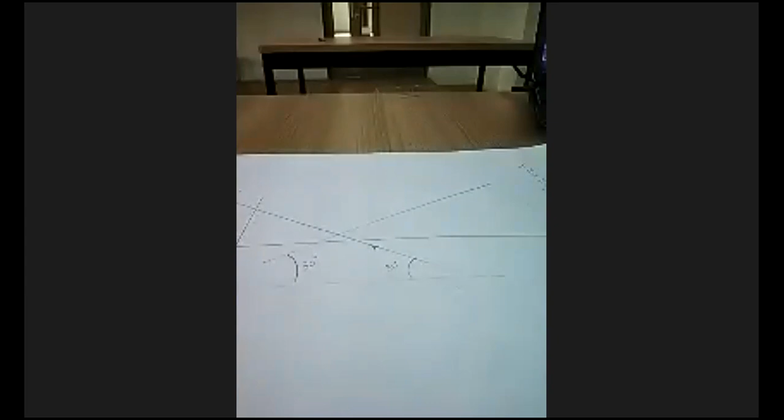And draw that line. This will be 30 degree. Clear? 30 degree. Similarly, you can draw 60 degree line with this portion. So 30 and 60 can easily be drawn with this set square. Understood?

Yes, sir. 45 degree line can be easily drawn with this set square. This is 45. This is 45. This is also 45. Okay, so 45 is also done. And

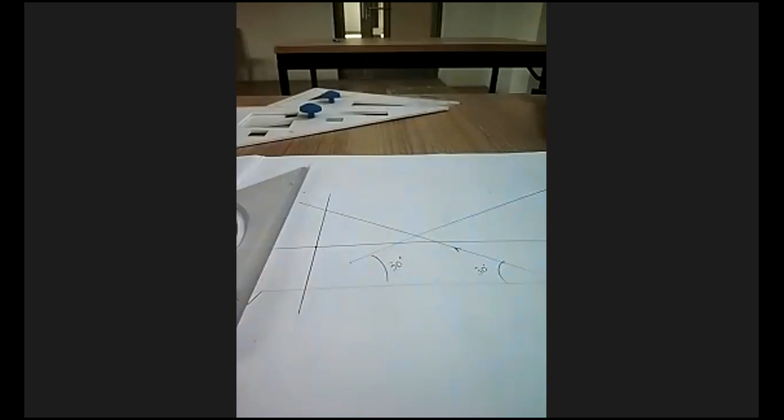75 degree. How we will draw 75 degree? Okay, we're using set square only. So for that, first of all, we have this reference line. This is first step. Then we will draw this perpendicular line to the reference line. Visible? This perpendicular line. Assume it to be perpendicular. Fine. Now what we will do? We'll do it like this.

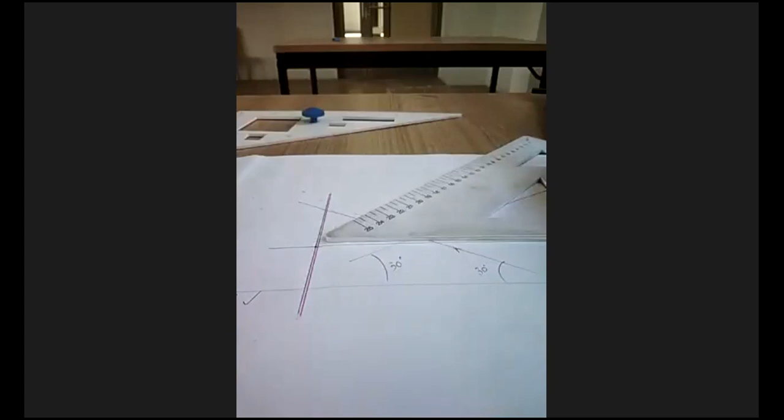How much angle is this? This is my set square. How much is this one? 45 degree. Okay, so I will put my horizontal edge on reference line. Clear? So this is right now 45 degree. And this is also 45 degree. Isn't it? Because earlier this was 90. Now it is 45. Correct or not? Yes, sir.

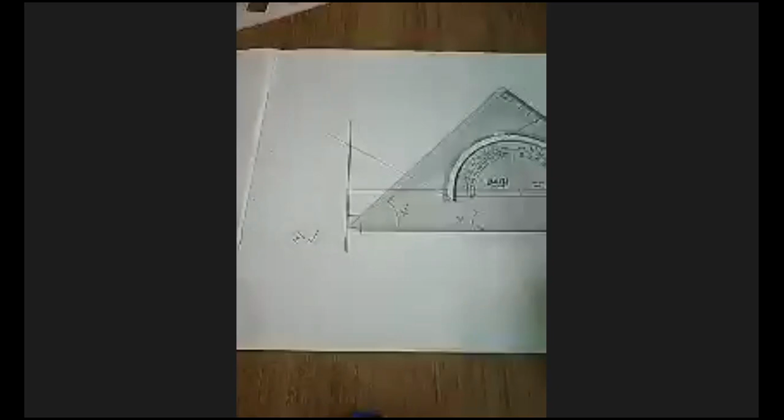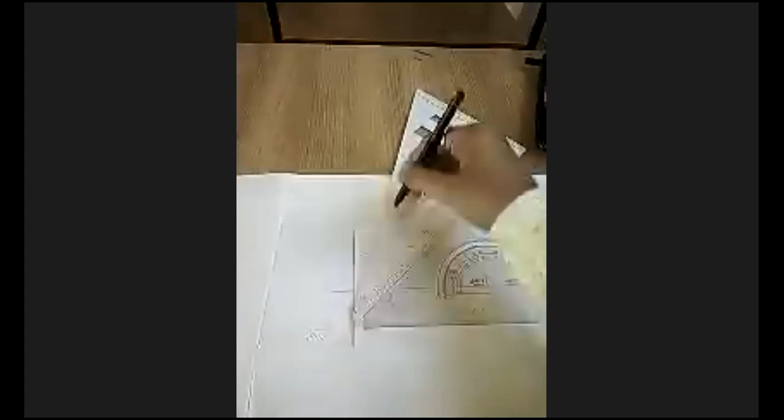Okay, now I am having this 30 degree set square. So I will put it like this. So now, how much degree is inscribed by both set squares together? This is 45. This is 30. So how much is it total? 75. Okay, so we can easily draw 75 degree line, isn't it? Now this line will be 75 degree. Isn't it?

Yes, sir. This is 45. This is 30. So total is 75. This angle 75. So we will draw that 75 degree line. That is also given 75 degree. So this will be 75 degree. Got it? This is our reference.

Everyone understood how we draw 75 degree line? Understood or not? Everyone understood how we draw 75-degree line? Yes, sir. Understood. Answer immediately. I need not ask 4-5 times.

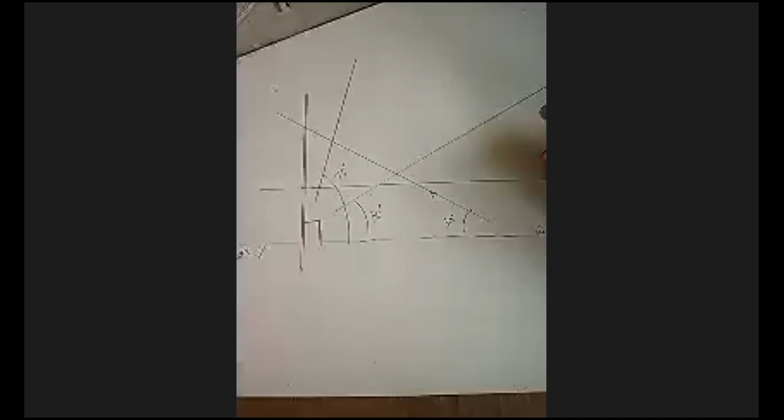Okay, now we will draw 15-degree line. Now answer me. This was earlier how much degree? This angle is

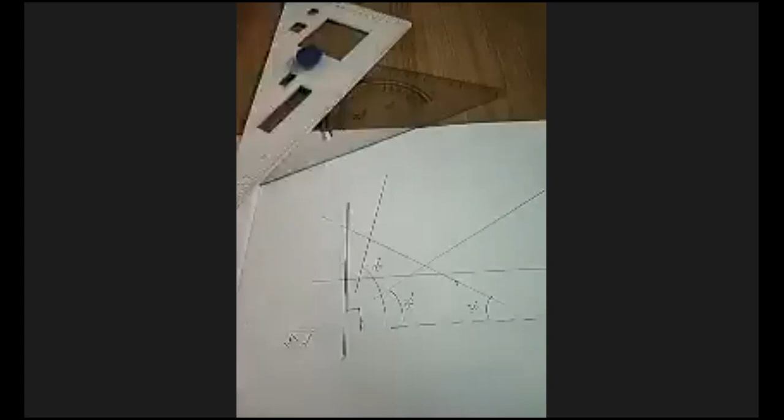What is this angle? Voice. Now is it audible? Yes, sir. Okay.

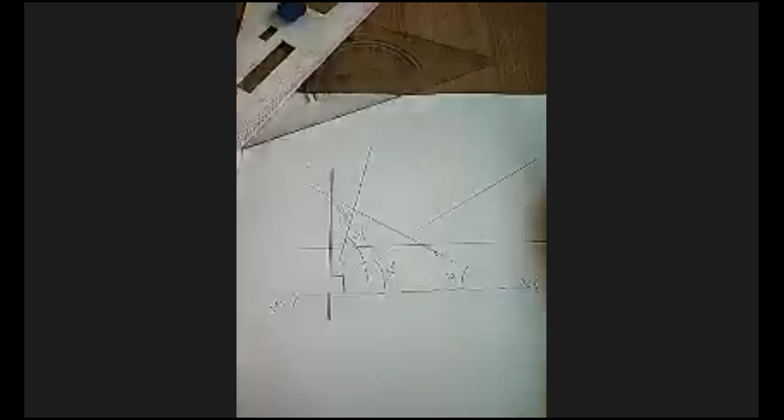So what is this angle? 90 degree. 90, right? And what we drew just recently, this angle, 75. So what will be the remaining angle? 15. So we require to draw 15-degree line only. So we will reverse our procedure. What we did for 75-degree, we will reverse our position. See how we will do.

What we will do? Now we will put this edge in this direction. Understood? So how much is this balance angle? 45. In that we will insert this 30-degree. So now how much will the balance angle be? 15. Correct. So that is how we draw 15-degree also. Got it? Yes, sir.

So from these you know how to draw 0-degree line, then 15-degree, 30-degree direct, 45, 60, 75-degree and 90-degree. All using just set square. Clear? Yes, sir. Okay. So this is your first problem. Fine. Now what is the second that we will see?

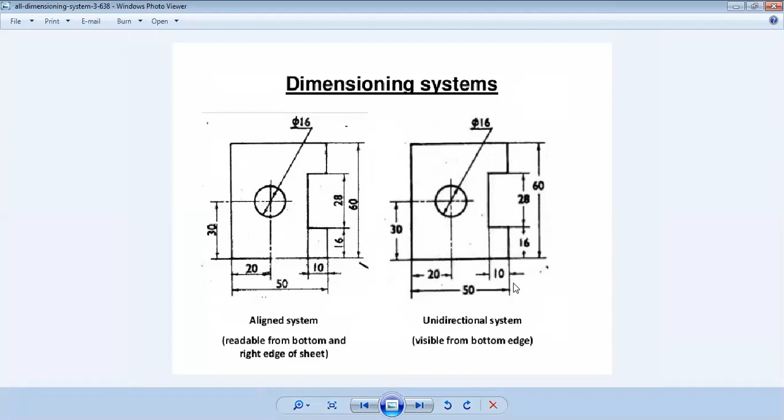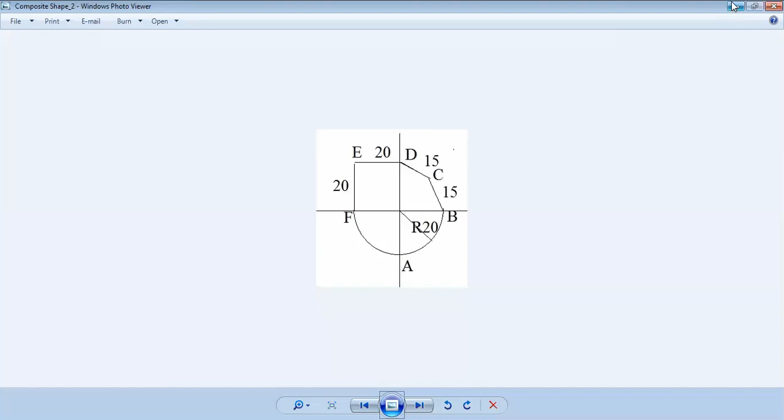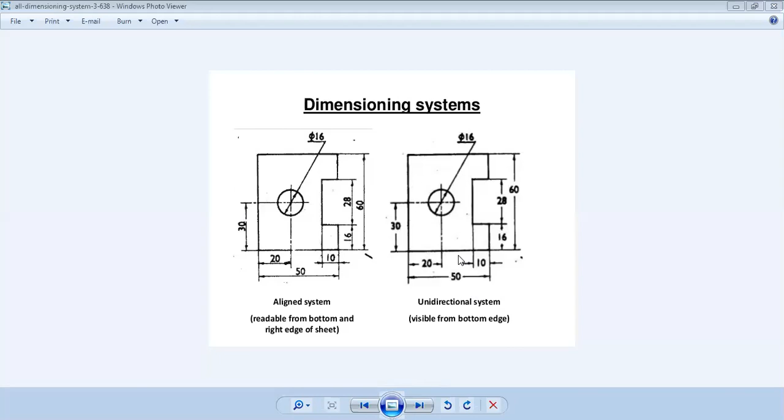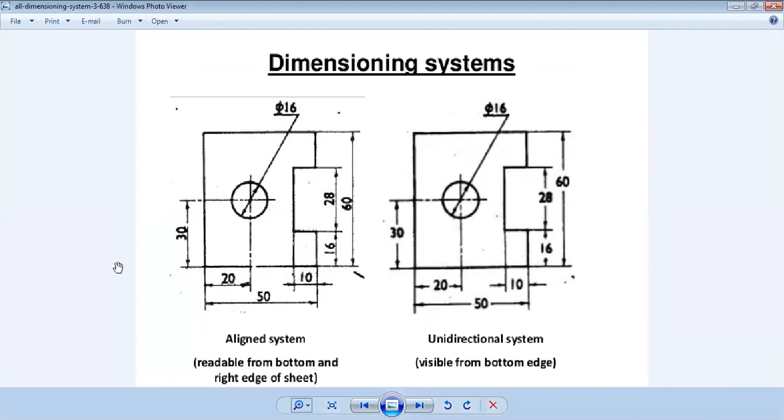Can you see my screen? Is it visible? Yes, sir. Okay, you take snapshot of this, so that at least dimension you can see. Okay. Visible? Everything? Yes, sir.

You take snapshot of this. You need to draw this one only to explain these two dimensioning styles. Now I will tell you what is the difference. There is very small difference between the two. First we will discuss unidirectional system. It is on the right hand side. See what its name suggests, unidirectional. So it is having single direction of viewing.

If you view it from the bottom of the sheet, all dimensions you can read in single direction. Are you getting me? See, this 30 is written like this, 16, phi. This phi is for diameter, then 10, 50. You can see all the dimensions from one direction in this way. Correct? That is called unidirectional system.

Whereas in aligned system, what happens? Aligned system works in two ways. First of all, it should be above this line. See here, in unidirection, you break the dimension line in between to write the number. You have broken this arrow to write 50 and then you again started this arrow. Are you noticing it here? Isn't it? Are you getting? Yes, sir. Okay. And in aligned method, what happened?

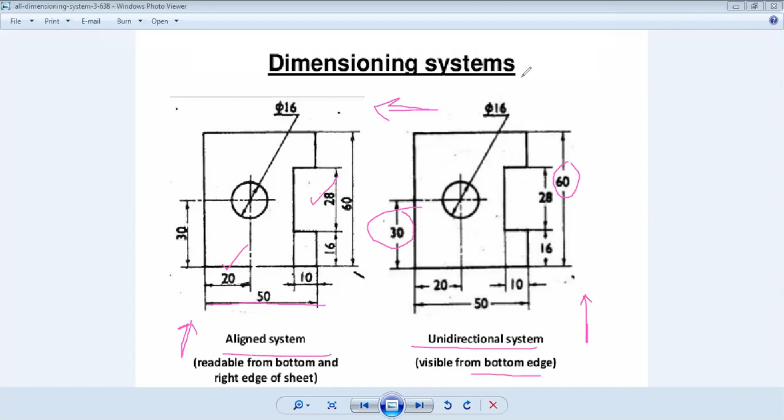Clear everyone? What is the difference between the two dimensioning systems? Everyone clear? Okay. So in exam you may be asked to dimension it by unidirectional system or aligned system. Then you need to follow this thing. If nothing is given, you can do it by your own, that is different thing. But if something is given, then you need to do it that way.

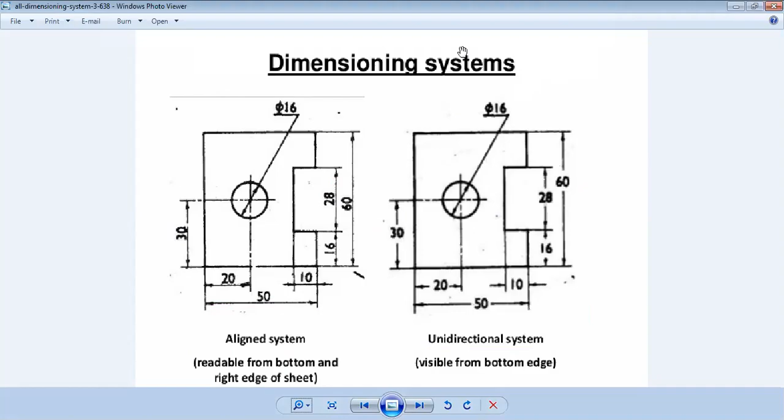Okay. We'll move to the next one now. What is the next problem? Now again to another dimension method, continuous or chain dimension and progressive or parallel dimension, that I will show you.

Now see here, this is chain or continuous dimensioning. How they are dimensioned. All the dimensions are aligned in such a way that an arrowhead of one dimension touches the arrowhead of another dimension adjacent to it.

Clear? So actually it is like this. This is one dimension, one head. This is another head. Here it is 50. You will write it like this. It is continuous like this. So it is like this. This thing is happening here. Clear?

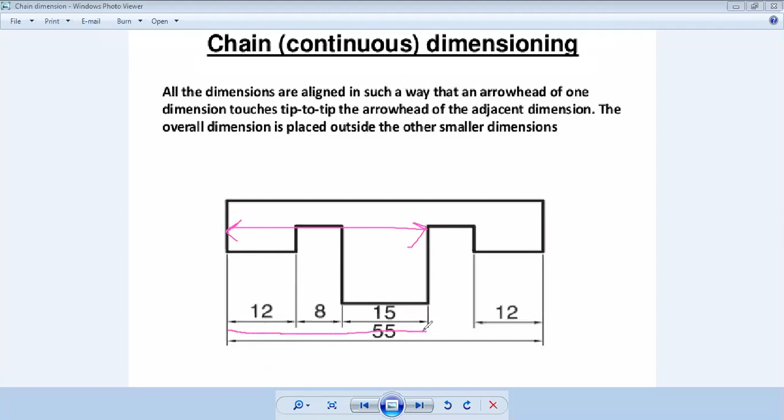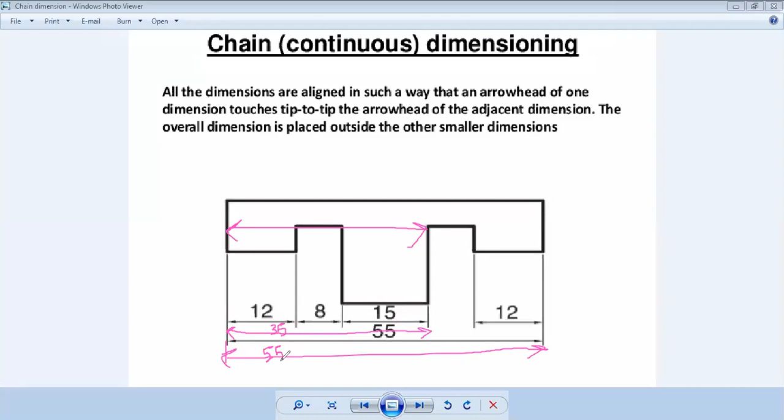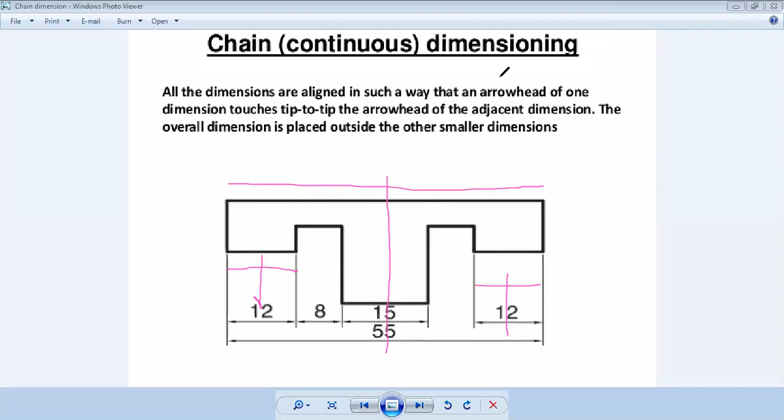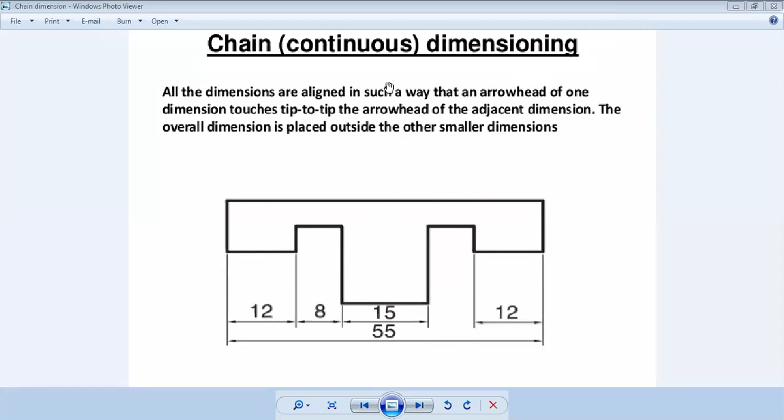Then 55 should be here. Here you should draw that 55. Are you getting me? How is this chain dimensioning? One more thing, if you carefully observe, all the dimensions are more or less at the center of that dimension. If this is the 12 distance, then it is almost at the center. See, if this total is 55, that number is written at center. This is 12, then it's center. So it should not be haphazardly written. Understand? This dimensioning is very, very important. You can't write anything anywhere, because proper dimensioning will avoid a lot of confusion. Clear about this continuous chain dimensioning? Yes. Okay, now we will see next.

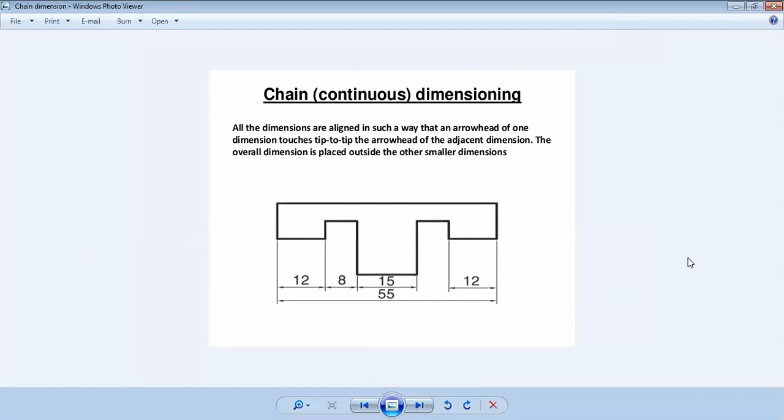Yes, sir. Now this is parallel dimensioning. See, same object, we are having the same object as in the previous case. You can please take a snapshot of these first of all. Take a screenshot of these, and then take a screenshot of this. Okay, so what is there in parallel or say progressive dimensioning?

All the dimensions are shown from a common reference line. That is the main thing, the common reference line. Okay, so in this case, this is the common reference line. All these dimensions share a common extension line. This is the common extension line. This method is adopted when dimensions have to be established from a particular datum surface. Okay, this is for your information.

Then the repeat thing is that a smaller dimension should always be placed nearer the view, and the next smaller dimension should be placed next, like these only. I told you earlier that you can't place 55 inside and 35 outside. You should go in this fashion only. Smaller dimension should be nearer to the object, then next bigger dimension, then next bigger dimension, and so on.

Again, if this is 12, then it is almost written at the center. This is 20, this is 20, and it is almost at the center of that much dimension. Likewise, this is 43, so this is center. Clear about this progressive or parallel dimensioning, and the other one, chain or continuous dimensioning.

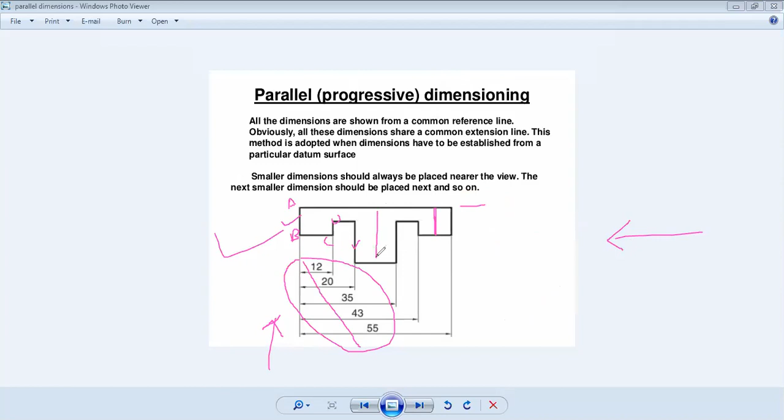Understand? Because in align system, we can read it from either bottom or right side - we can read this dimension from any two directions. So all the vertical dimensions which we are having like these, you need to read it from this. Now if this is say for example 35, then first of all you need to dimension these, then from here 35 - you can't take 35 inside, 35 should be outside. Clear?

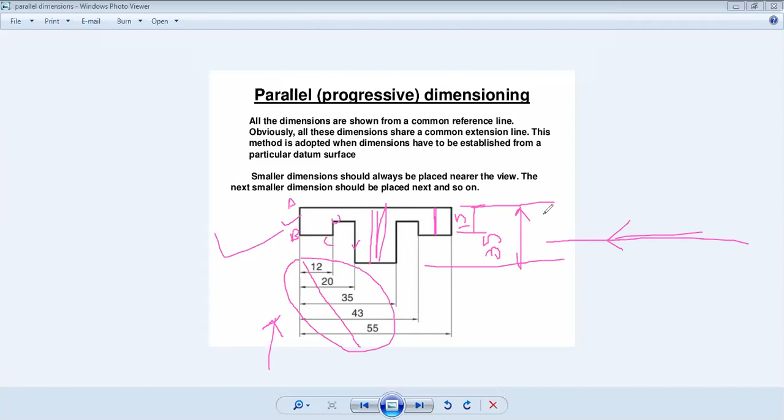Understood everyone? And in this dimensioning method, basically how many dimension systems do we have? Two dimension systems - aligned system and unidirectional system. Now under both we can have either chain or parallel, or say continuous or progressive. We can have these two.

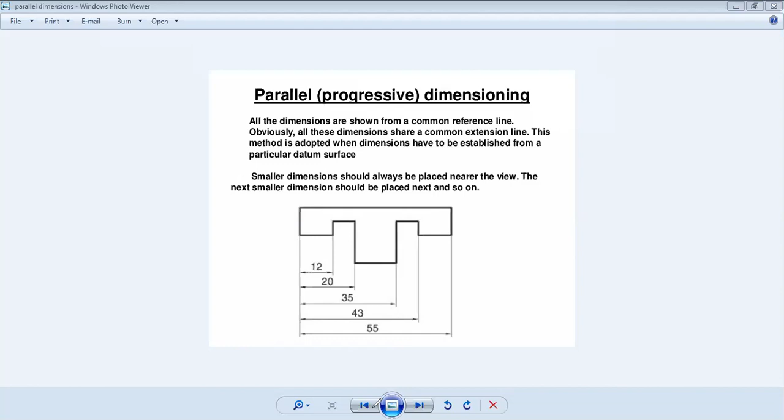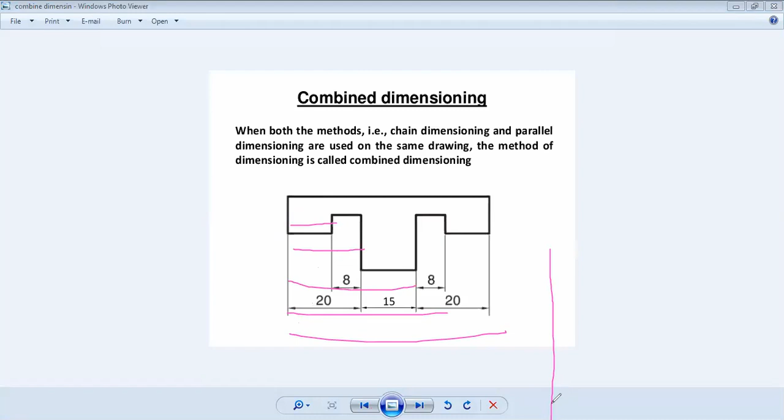Understand? Okay, now at times you may be given like these also, that is combined. So if any one system is to be followed here, it will make things a lot complex, because you will write first this dimension, then this dimension, then this dimension, and these, and your object is this much and dimension will go up to here. So to avoid that, combined system is also followed, wherein smaller dimensions are given in some form like this, and the remaining are given in some form. Understood?

This is why I am discussing that when you see a question paper, some textbook, or some actual engineering drawing, then you can understand what dimensions are these. Clear? Any doubt, anyone? No sir. Okay, so now we will discuss.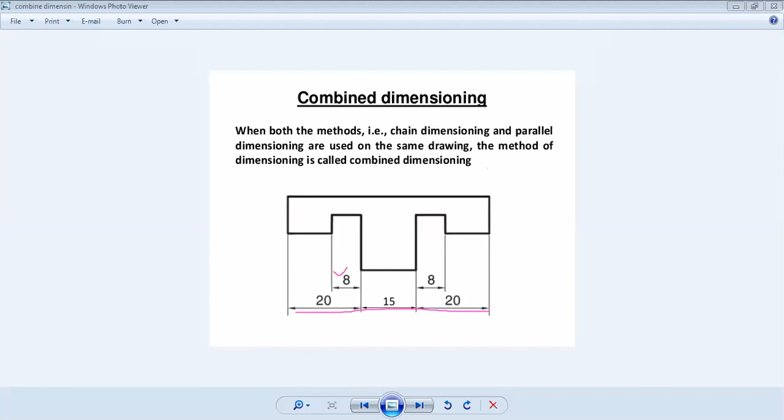First of all, we will discuss problem number 6. Do you know how to draw that? Problem number 6, we have already done that.

Come on, answer me fast - problem number 6, what is that? Divide a straight 80 mm long line into 9 equal parts. How will you do that? Quickly, anyone answer me. Don't say you don't know - everyone should know. We have done it repeatedly.

Can anyone draw on my screen? Arjun, can you draw? Can you tell me how to do it? Arjun, can you tell me how to do that? You are not audible. Rishabh. Sir, question is not visible. The question is already with you, it has been said - PDF document is shared, na? Look into that.

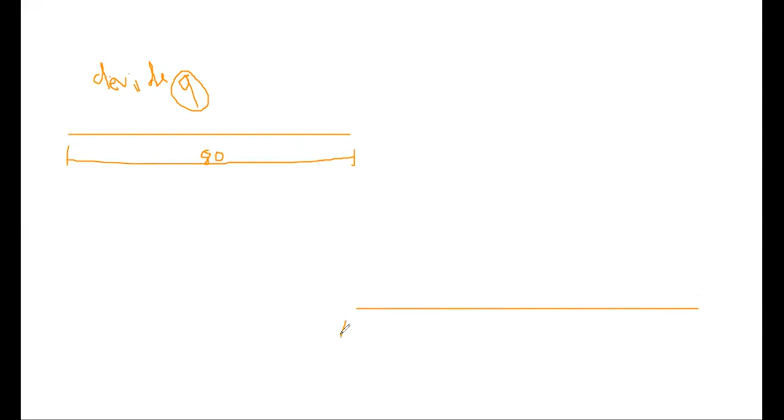Okay, we won't waste much time since you are not communicating what to do. So first of all we will draw this given line. Correct? At least answer yes sir. Yes sir. Okay, now that is the given length, that is 80. Okay, now we will draw one inclined line.

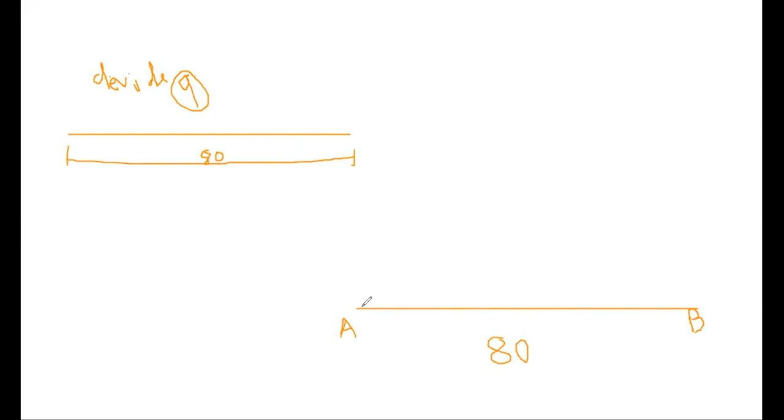Any angle, no matter what - we'll draw it like this. Okay, clear. Now how many parts do we need to draw? 9, 9. So for easiness, we will draw it 9 centimeters long, like this. This is 90 mm - we have done this in parabola, etc. So this is 90.

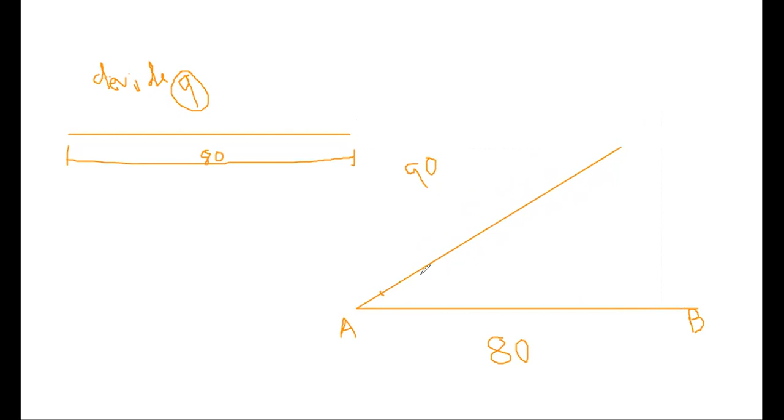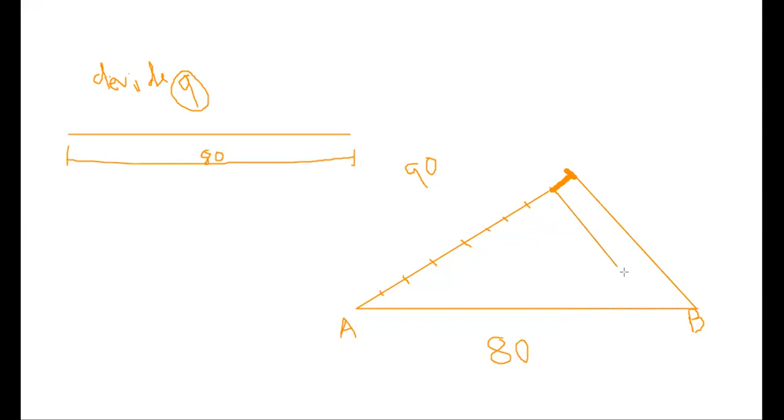Like this, clear? Then we will draw parallel lines to this line from all these points, like this. Clear? Like this.

These, and so on. You assume it uniform. Okay, they are uniform.

So ultimately this 8 centimeter line is divided into how many parts? 1 2 3 4 5 6 7 8 and 9. Clear, everyone? Yes, sir. Okay, now next one.

First of all, we will see the last problem. What is that? Single stroke alphabets in dimension given below, capital letters, height 12 mm, width 8 mm, gap between two characters 2 mm, at angle 90 degrees, so you need not incline that.

And small letters, all dimensions are given. How to write this, and digits also. Okay, so I will share that.